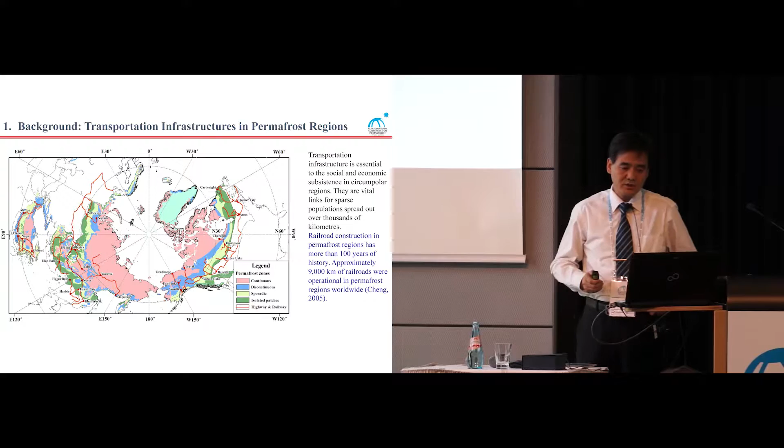Transportation infrastructure is essential to social and economic subsistence in polar regions, and is very critical for sparse populations spread out over thousands of kilometers. In fact, railroad construction in permafrost regions has more than 100 years of history. Approximately 9,000 kilometers of railroad were operational in permafrost regions before the Qinghai-Tibet Railway was constructed.

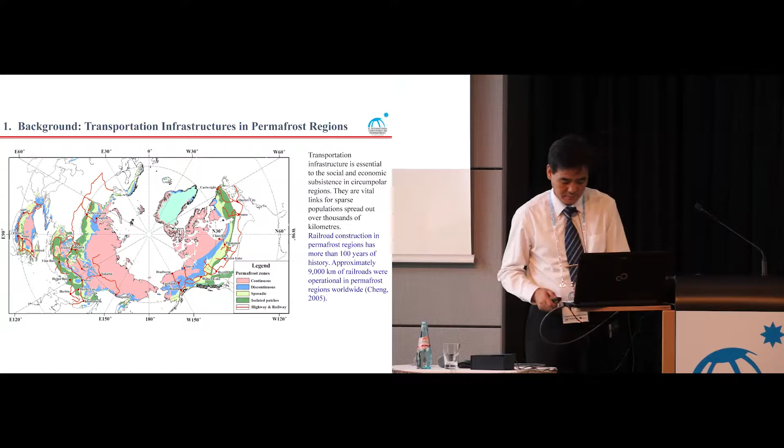In China, permafrost is distributed over about 1/4 of the land territory, with the main part on the Qinghai-Tibet Plateau, which we call high-altitude permafrost. It's about 7% of the Tibet Plateau land area. Another area is in northeast China, similar to the permafrost in Russia.

We can see many roads and highways in permafrost regions, and here is the oldest railroad in northeast China.

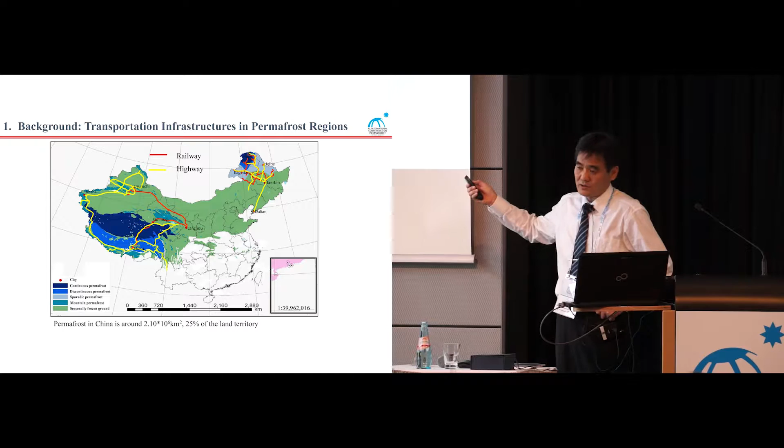That is similar to the population of Macau, China, so that is a very sparse population in the northern part. In Yukon and the Northwest Territories, the population is only 80,000 — that's equivalent to all the people who could gather in the National Stadium in Beijing. So the population is pretty sparse.

However, transportation infrastructure is critical, and sometimes life-supporting, for local people and social development. So how about permafrost influencing infrastructure? At first, we know normally permafrost is enriched in ground ice and sensitive to temperature change.

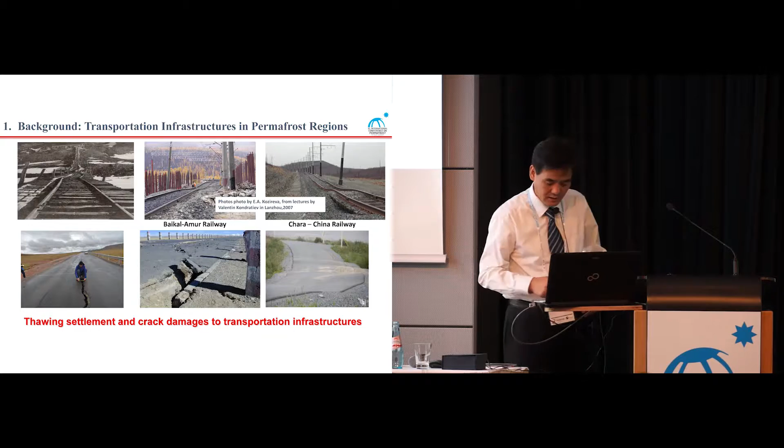We can also see settlement on the Alaska Highway. So thaw settlement causes damage to transportation infrastructures, affecting nearly all of them.

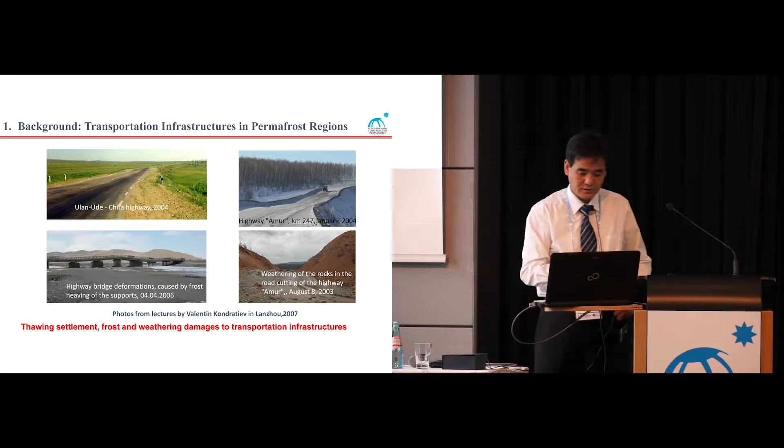Another problem is frost heave, like this one — the pole was frost-uplifted and the surface is tilted. So thaw settlement, frost heave, and even weathering of the rocks can damage transportation infrastructures. Anyway, thaw settlement is the most serious one.

So how about the situation of existing infrastructures? According to investigation, about 30% of the total length of the Trans-Siberian Railway was damaged. Of the Baikal Railway, the damaged region is over 30%. Of the Qinghai-Tibet Highway, the damaged region is also over 30%. So, in total, the damaged region was over 30% for existing roads before the Qinghai-Tibet Railway was constructed.

So permafrost degradation is still an enormous challenge. How about permafrost degradation? I'm not just concerned with how much and how large an area of permafrost has degraded — our IPA president, Professor Antoni Lewkowicz, said it is not permanent. What we know is that disturbing because permafrost thaw tends to be irreversible.

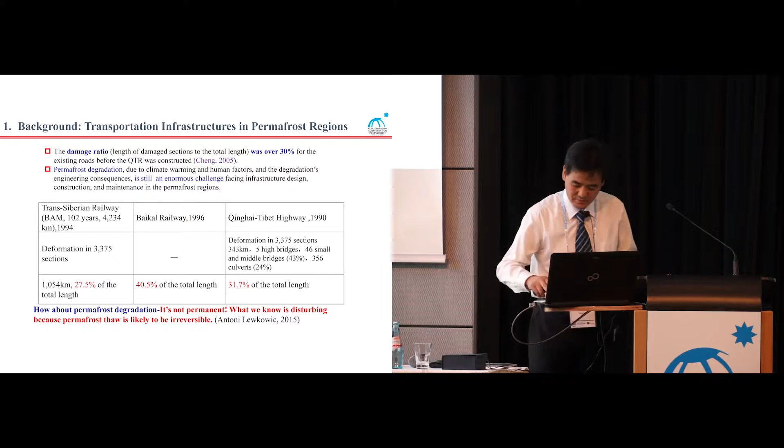That is permafrost change and infrastructure around the world. How about permafrost degradation on transportation infrastructures? First, let's look at global natural changes — Lawrence and Slater predicted degradation of permafrost area by 62% and 90% under different scenarios.

Recent results also show the same degradation trend. Chinese researchers projected changes in high-latitude and high-altitude permafrost regions during the period from 1986 to 2099, meaning degradation will continue.

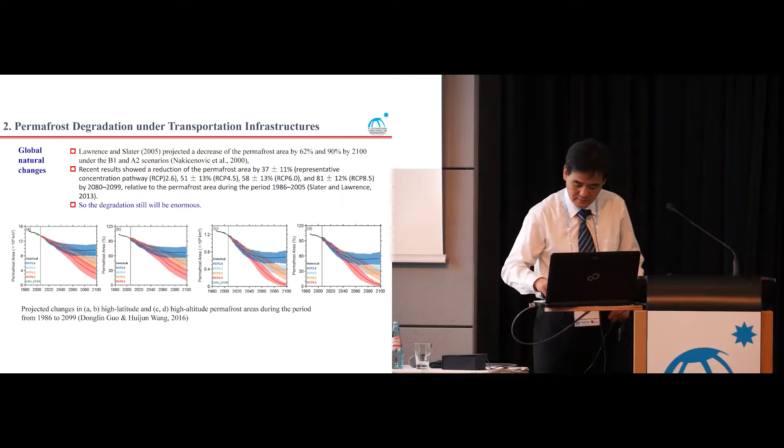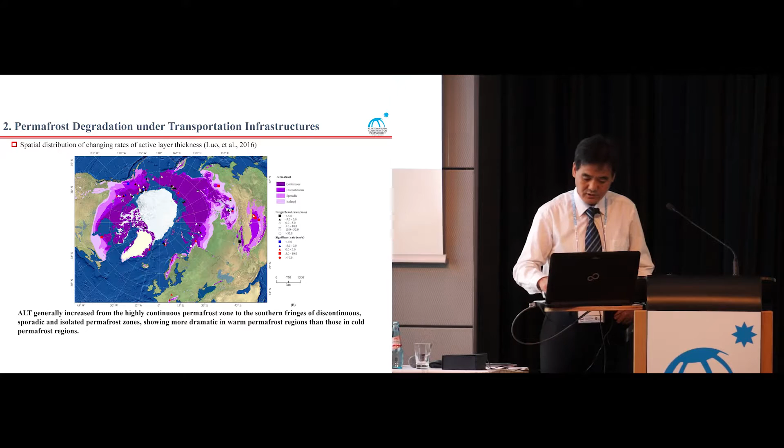So how about the degradation-caused risks or damages to local infrastructures? Professor Nielsen showed pictures about the risk around the Arctic regions and also Tibet regions. We can see the most serious region is around this area, and also on the Qinghai-Tibet Plateau.

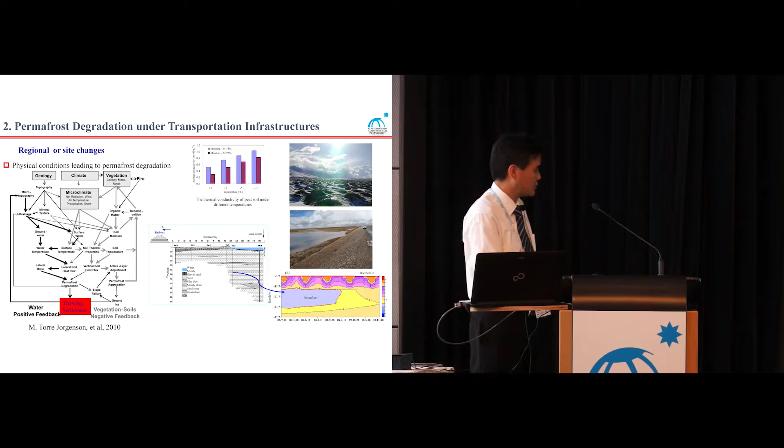So how to solve the problems? Again, we use this map that Professor Jorgenson showed. It's quite complex. Anyway, from the physical conditions leading to permafrost degradation, it's somewhat about geology and climate, especially microclimate change, and the vegetation on the surface may change. At last, the problem influencing the infrastructures is soil settlement, like removing the peat soil, because peat soil in thawed and frozen states has quite different thermal conductivity, and it's also related to water content and surface water gathering.

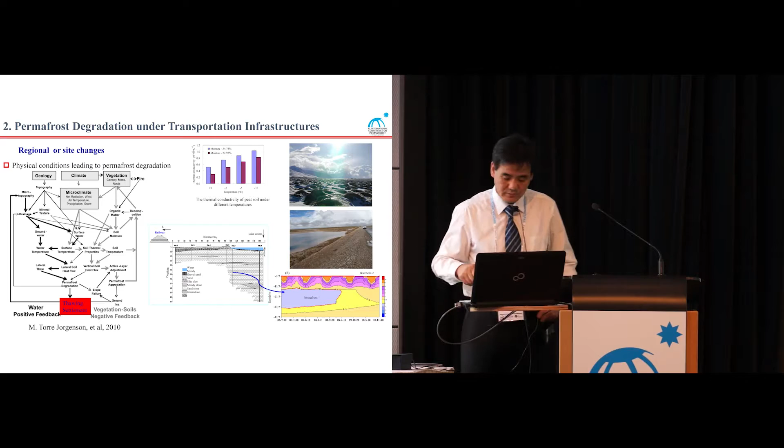Fortunately, we monitored a thermokarst lake near the Qinghai-Tibet Railway Highway. In 3 years, about 23 meters of the thermokarst frozen soil disappeared, from 2006 to 2009, as this picture shows. That means water gathering on the surface can influence local factors by degrading the permafrost.

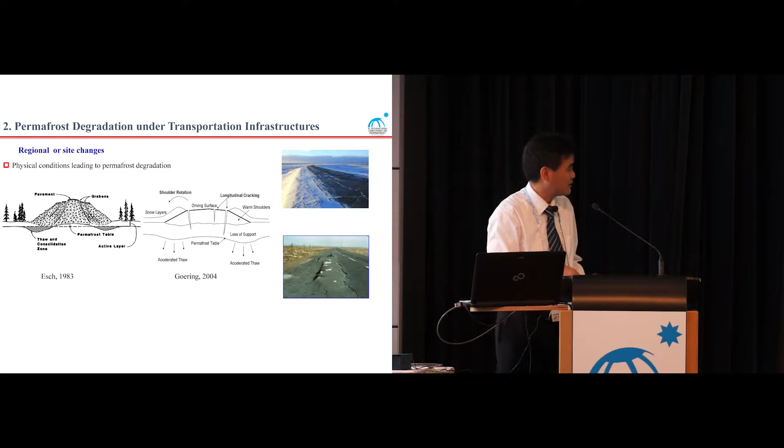Because of soil degradation, the physical conditions of the embankment will also change. Because of thawing at the toe of the slopes, the soil will be consolidated, and because of the slopes on two sides, heat will be absorbed from the slope surface and the embankment surface. Even because of snow cover, the warming will lead to degradation of the permafrost here. So sometimes cracks caused by settlement will occur, and even sometimes landslides or serious settlement.

Some site monitoring results really prove this. Like this site along the Qinghai-Tibet Highway, we can see from 1996 to 2007 the thickness of the active layer is increasing, and the deformation is continuing, shown here by the deformation data. The deformation is well related to the thawing rate, meaning that with continuous degradation of permafrost, the deformation of the embankment or road bed will continue.

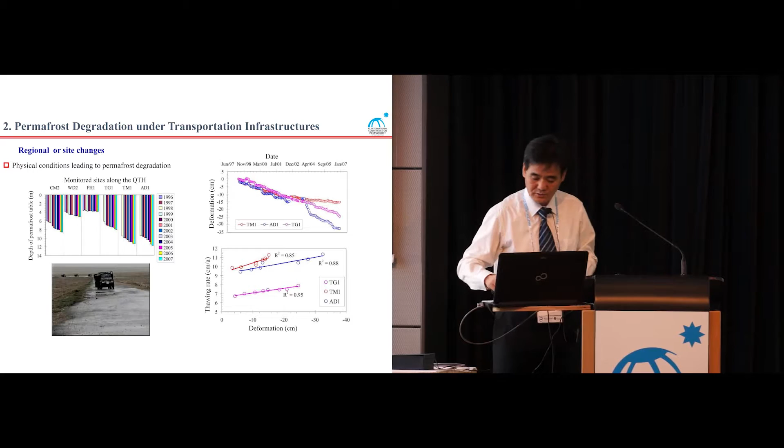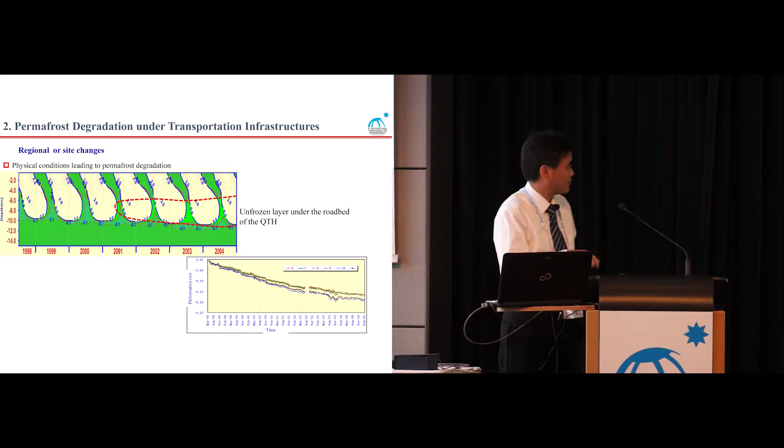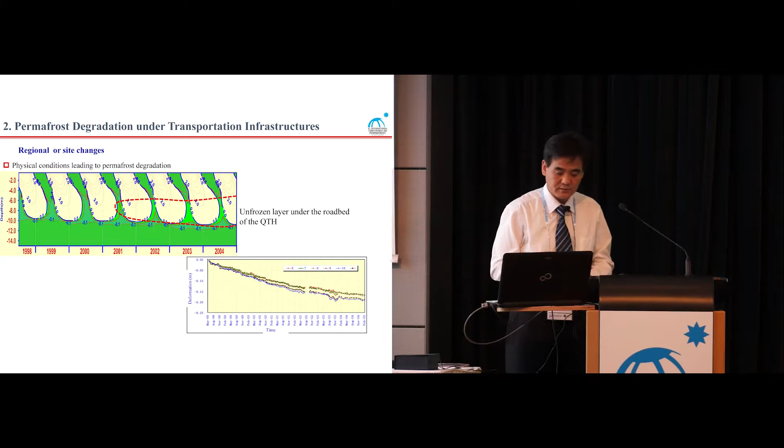Sometimes an unfrozen layer or unfrozen core will be formed under the embankment. This is also from the Qinghai-Tibet Highway: from 2001, a 4-meter-thick unfrozen layer formed, and the deformation of the embankment continued. So we can see the degradation or thawing of permafrost can cause engineering problems and damage to infrastructures.

So how to solve or prevent the problems? We can see some engineering development of adaptive capacity. At first, we have the traditional passive method. We have studied this kind of method for a couple of years. In the past, like this old lady selling ice lolly, she covers it with a quilt. But unfortunately, this kind of method cannot solve the melting problems forever, even for a long time.

So we tend to increase the thermal resistance by increasing the embankment height from the engineering side. But if the embankment height is increased, the slope area will increase, so heat absorbed from the sunshine will increase. So maybe the embankment should instead be lowered, and at last there should be a reasonable height in different regions. Anyway, the passive method, even using geotextile, can only delay the permafrost thawing, but cannot ensure thermal and dynamic stability of the permafrost for a long time.

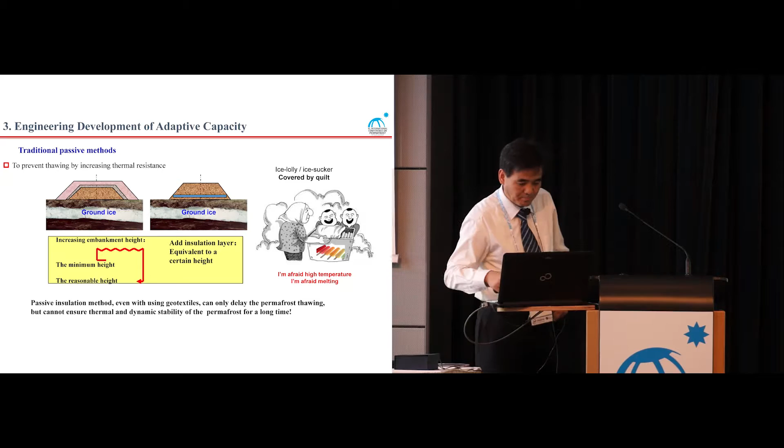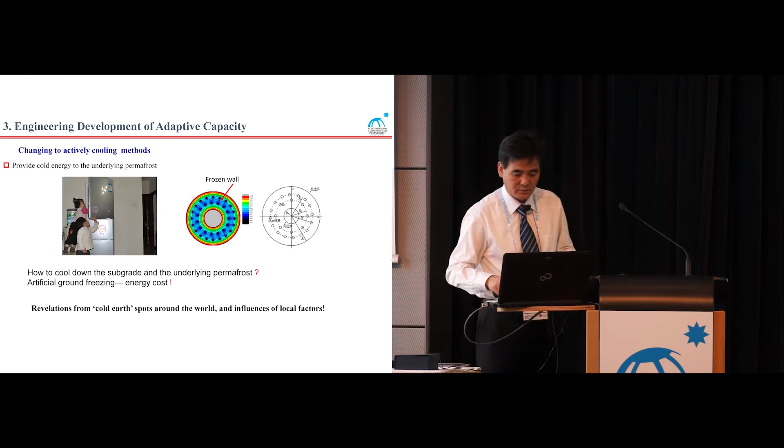So what can we do? Can we use an artificial ground freezing method? The answer is no, because it's too energy costly. So how to cool down the subgrade and underlying permafrost? As artificial ground freezing cannot be used, to find where to get the cool energy we turn to cold regions around the world to see what factors influence the existence of permafrost.

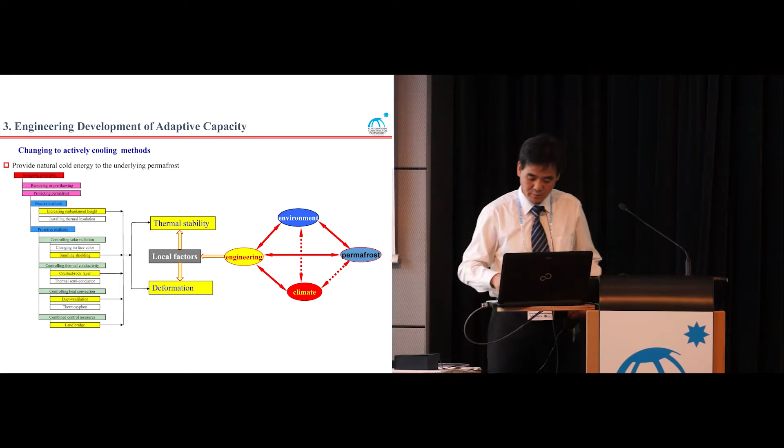In this way, we can control radiation, control thermal conductivity, and control heat convection. Because there's a complex interaction between environment, permafrost, climate and engineering, the only way is to use engineering methods to change local factors to influence thermal stability and deformation, and to control the deformation. So again, we use this system involving geology, climate, especially microclimate, and surface conditions.

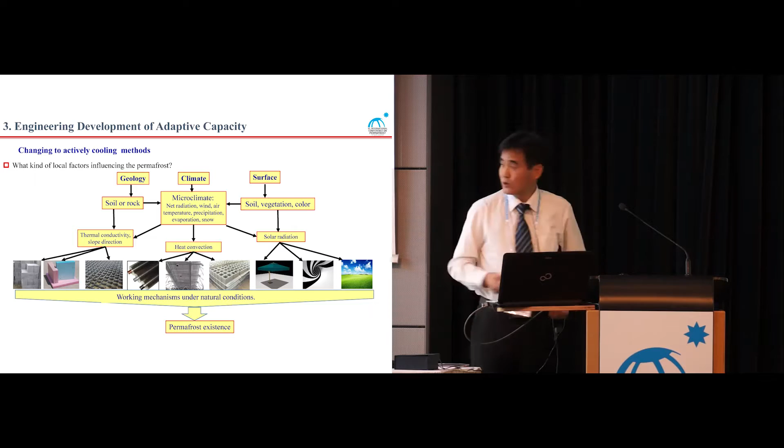At first, we can change the soil or the rock or some other kind of materials. We can also use heat convection methods like the thermosiphon, and ducts, and things like hollow bricks. And we can change the color of the surface. We can also use sunshine shading and grass cover.

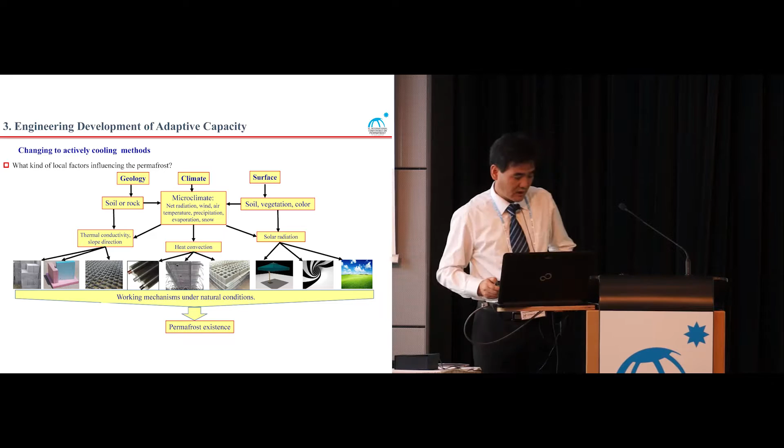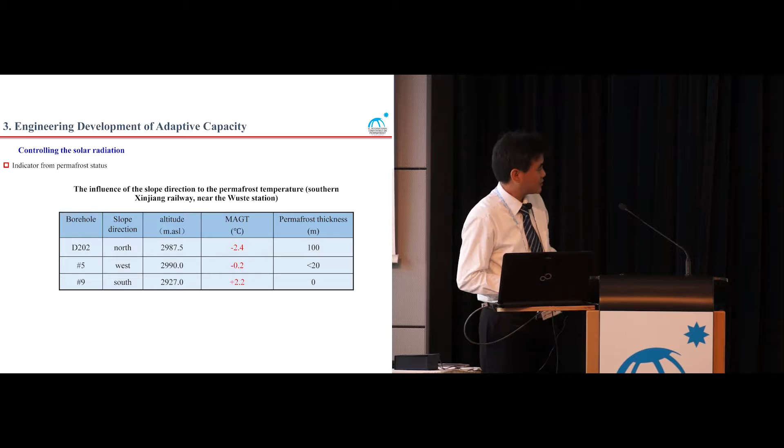So why do we control solar radiation? At first, we can see some indicators from permafrost status. This table shows the ground temperature at the north slope near the Wuste station in Xinjiang province, West China. The ground temperature is minus 2.4, and the permafrost thickness is around 100 meters. But on the west and south slopes, the ground temperature is quite high.

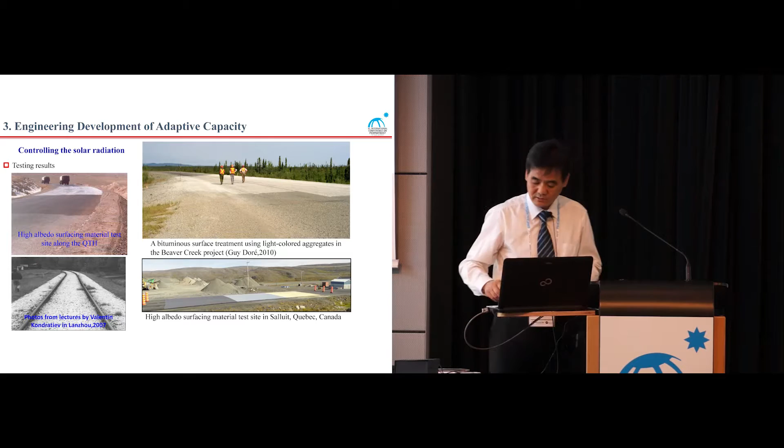So controlling solar radiation can greatly influence permafrost status. In engineering, high albedo surface materials were tested along the Qinghai Tibet Highway, but now it is disappearing. Also, bituminous surface treatments using light color aggregates were tried in the Beaver Creek project, supported by Guy Doré. High albedo materials were also tested in Salluit, Quebec, and sometimes the ballast can be painted white to reduce radiation absorption.

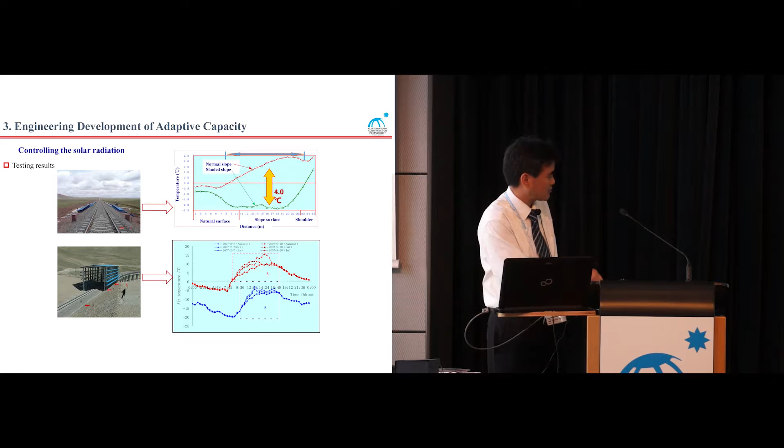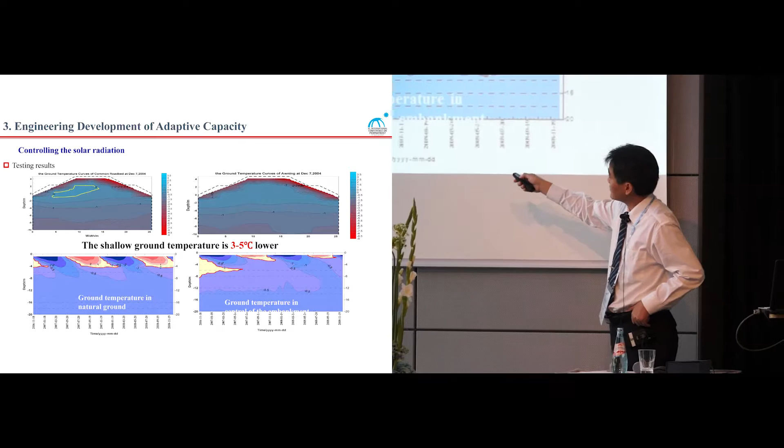There are many sites covered by blocks, scree, colluvium, or talus slopes where we find ground temperatures different from the nearby area. At least 20 reported cases around the world show the ground temperature is greatly lower than the surrounding areas.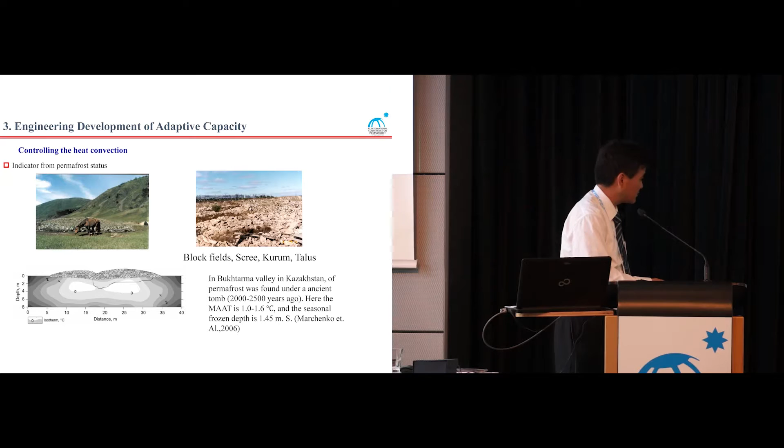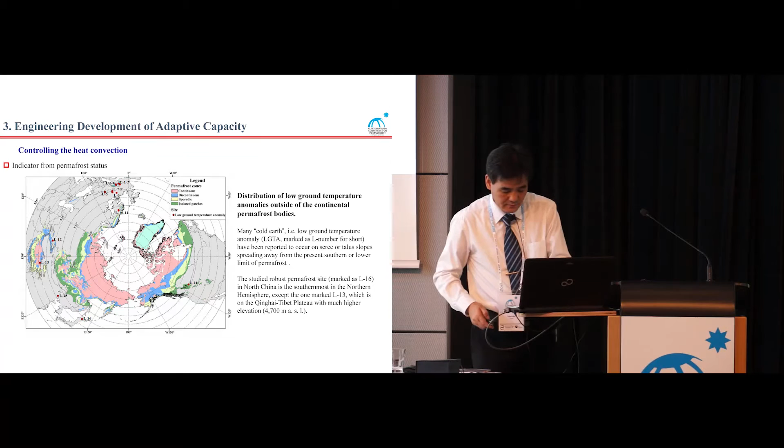I monitored this site in China. It is 200 kilometers from Beijing and 600 kilometers from the south edge of the permafrost. The air temperature here is about 7.3 degrees Celsius, but we can see here that in some regions there are no trees.

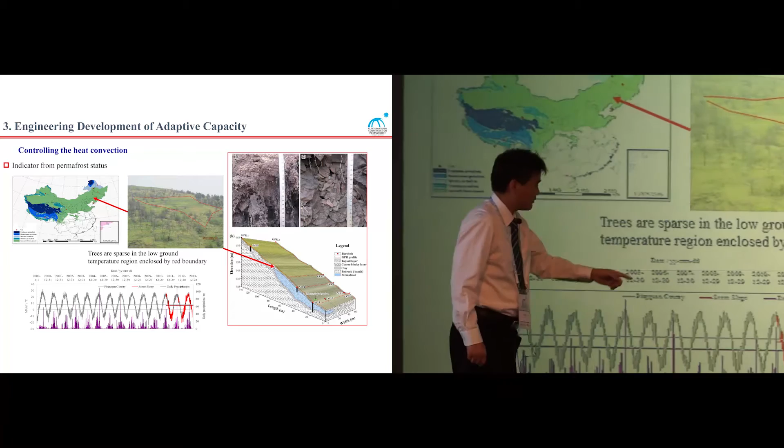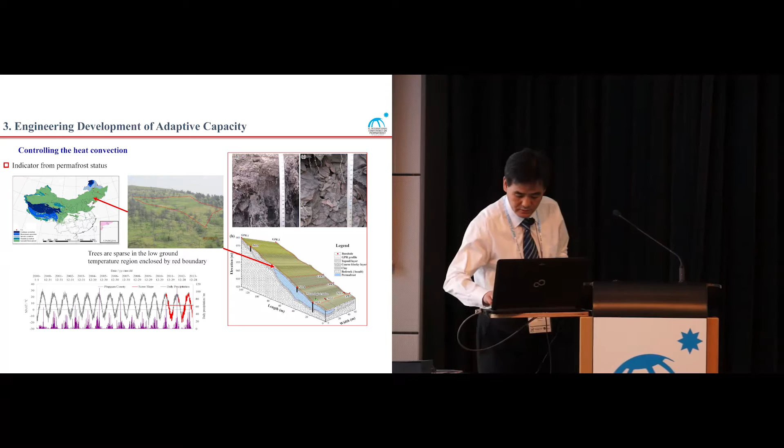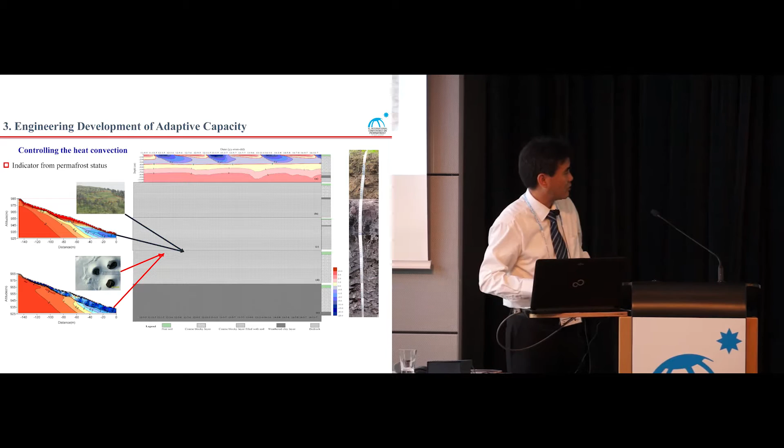In some regions there are no trees. Investigating with GPR and monitoring work, we can see there's permafrost around these areas, under the crushed rocks, with ground temperatures like this. In winter, from these two boreholes, we see minimal ground temperature around -5, and average around -1. In summertime there are no trees, and in wintertime there are holes on the floor, meaning air is convecting inside.

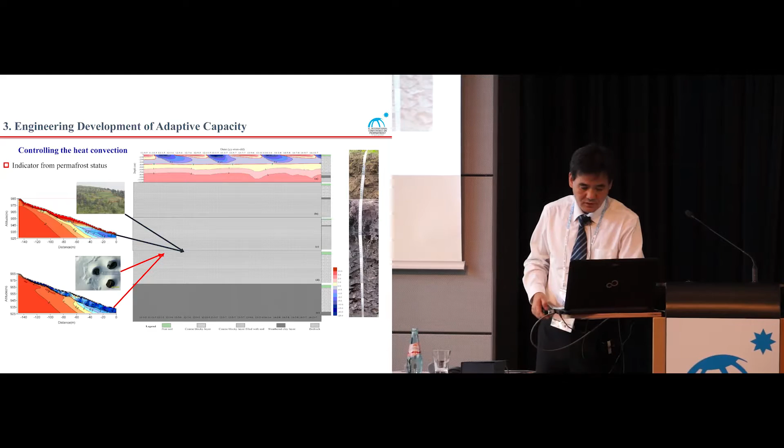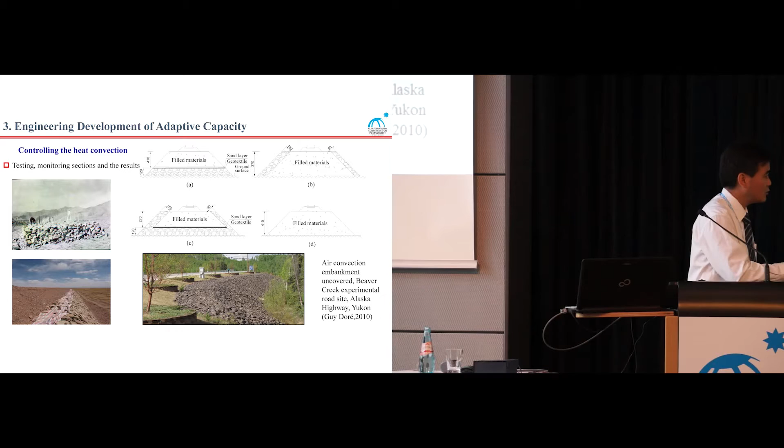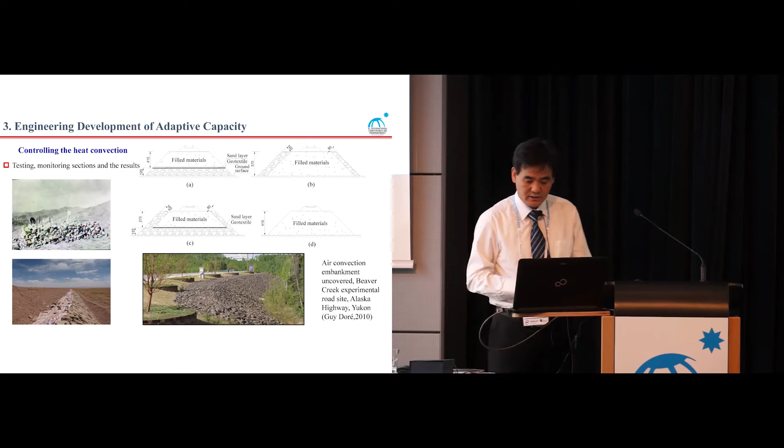From this, we can apply it to infrastructure construction. This was tested by Professor Cheng Guodong around the 1970s, with quite good results. We used three kinds of structures: crushed rock basement embankment, crushed rock sloped embankment, and U-shaped crushed rock embankment, also called air convection embankment, ACE embankment, at the Beaver Creek experiment site. So how about the monitoring result?

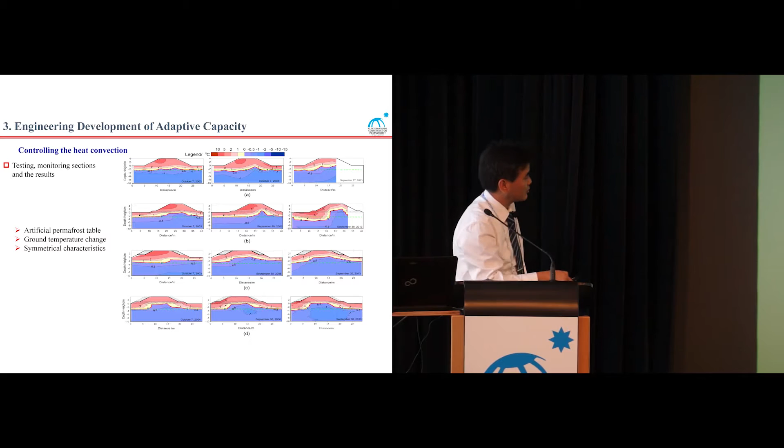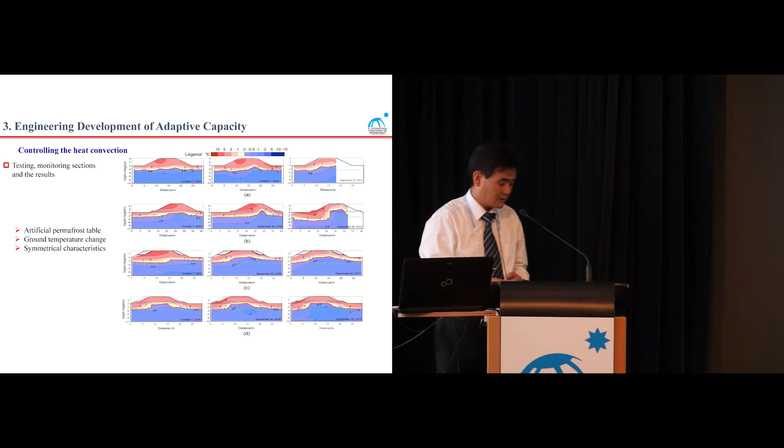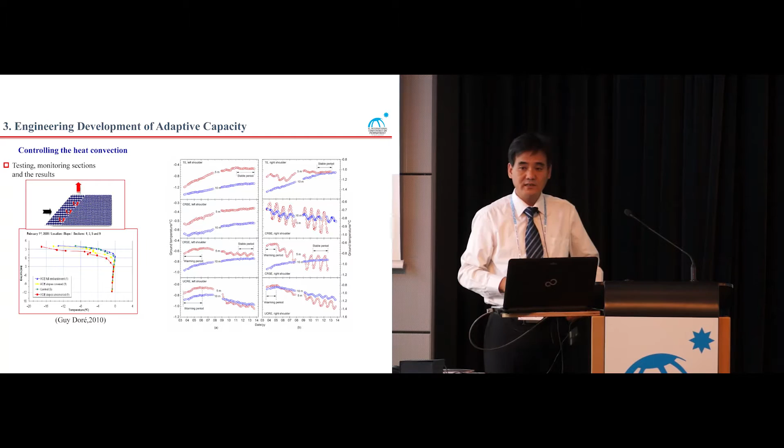At first, the upper one is the traditional embankment. We can see after construction, the ground temperature increased. On the crushed rock basement, sloped, and U-shaped embankments, the ground temperature was lowered. Unfortunately, the symmetrical character of this one is not good because it can cause cracks. The same result was obtained at the Beaver Creek site, and ground temperature monitored over 10 years shows that after the first 3 or 4 years, ground temperature at different depths decreased.

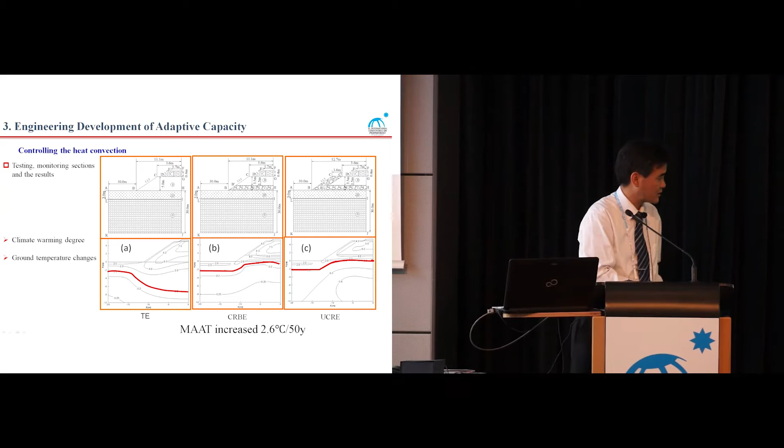How about structures to resist climate warming? From numerical simulation, we can see that if air temperature increases by 2.6 degrees over 50 years, such structures can still protect the underlying permafrost. But the traditional embankment cannot protect the underlying permafrost.

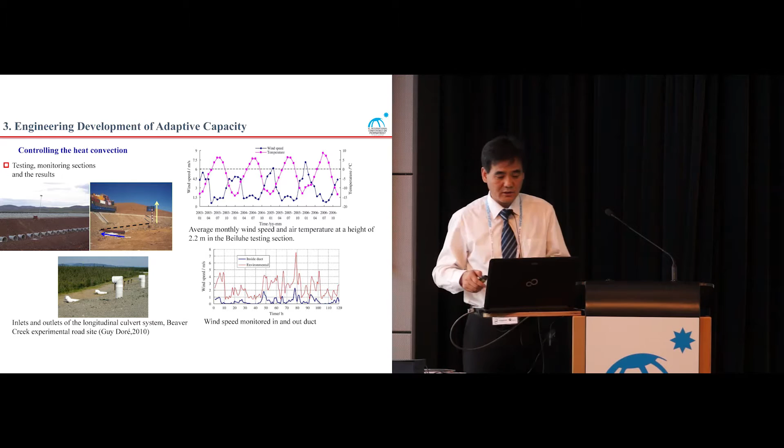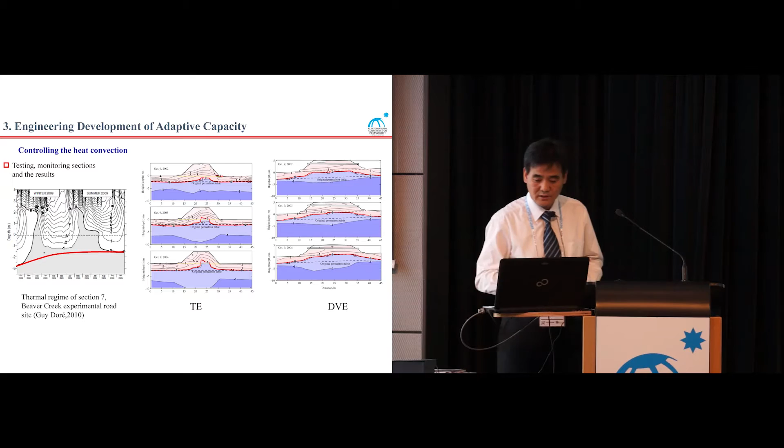The result from Beaver Creek shows the thawing depth was lowered. Also, just after one year, the permafrost temperature on the traditional embankment is quite high, while on the duct ventilation embankment it is quite lower. This is also what Professor Guy Doré called the heat drain structures at Beaver Creek.

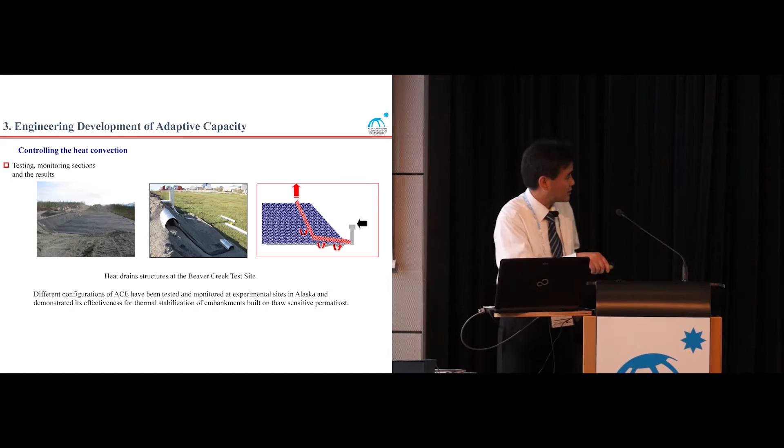Similarly, the mechanism is the same to let air convection flow into the embankment to cool down the soils. The third method is to control thermal conductivity.

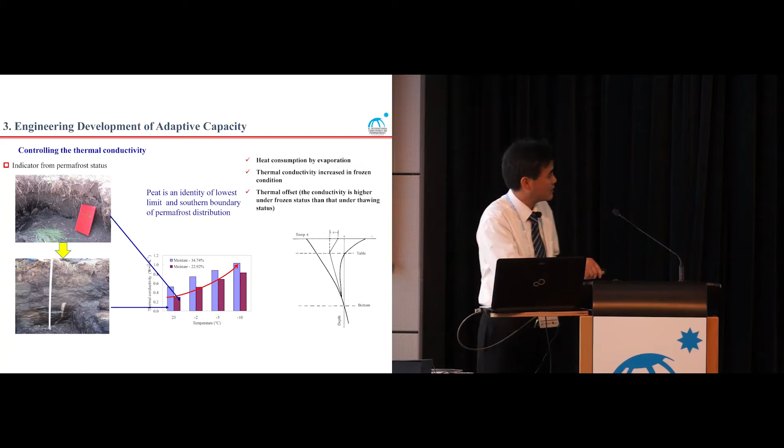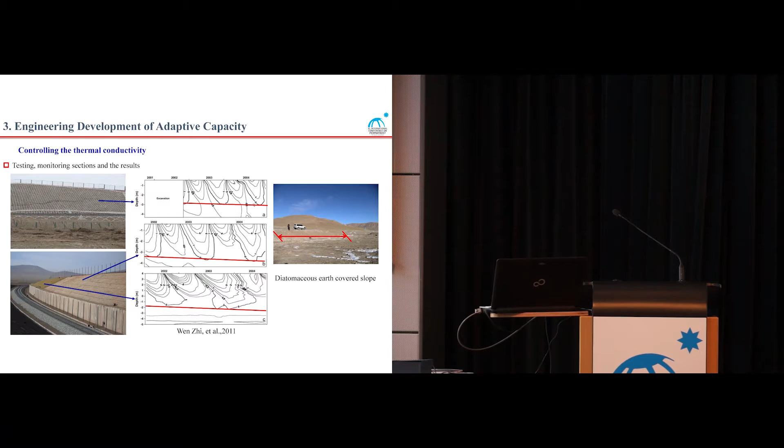The peat soils' conductivity differs under different temperatures and water content. We can also use offsets at the surface. This is shown along the Qinghai Tibet highway and railway. Here it's covered by grass, and the ground temperature is quite lower, while these form materials are somewhat warmer. Without anything covering it, the ground temperature is quite high.

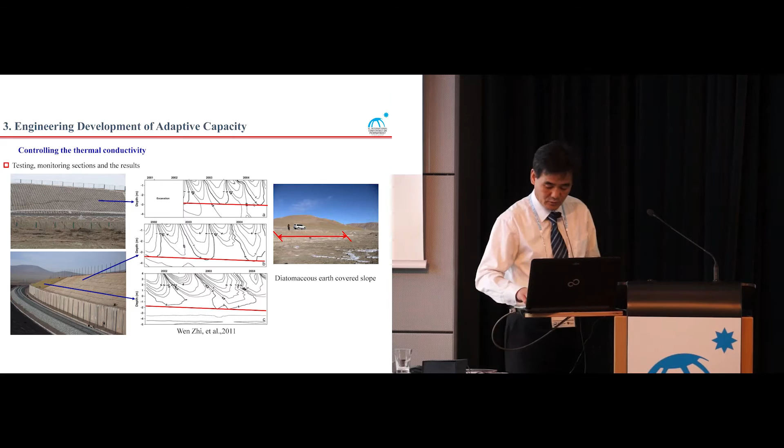So this is a kind of passive method that can resist warming, but eventually it will fail. A thermal insulation layer was also used, and we can see it just cuts down the range of temperature changes rising.

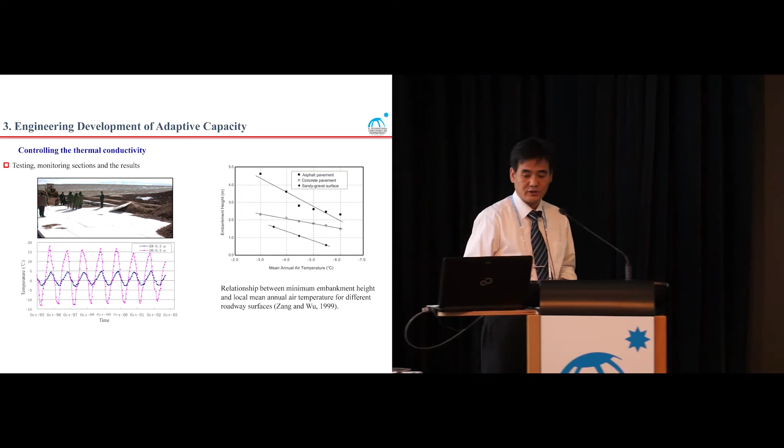Another way is to use thermosiphon. Anyway, this one is very expensive, but it is effective.

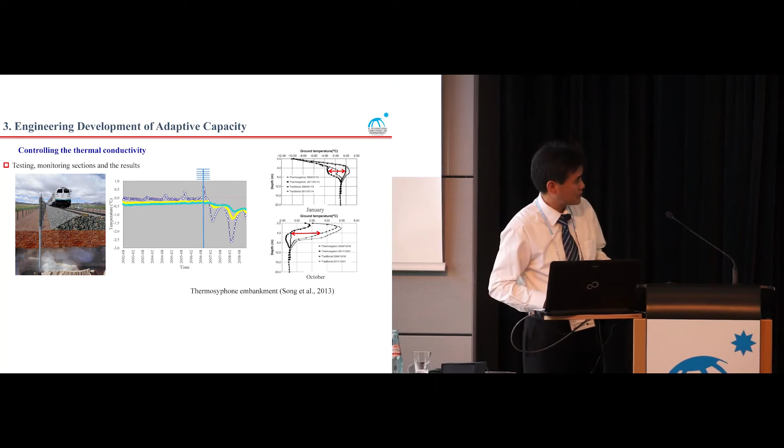We installed a lot of thermosiphons along the Qinghai Tibet highway railway because the ground temperature on the Tibet plateau is quite higher than in Arctic regions. When the thermosiphon was installed, the ground temperature greatly decreased, as shown from borehole monitoring at different depths.

If the condition is very complex or difficult to solve, then a dry bridge can be applied. The longest dry bridge of the Qinghai Tibet Railway is 11.7 kilometers long, in warm and ice-rich permafrost.

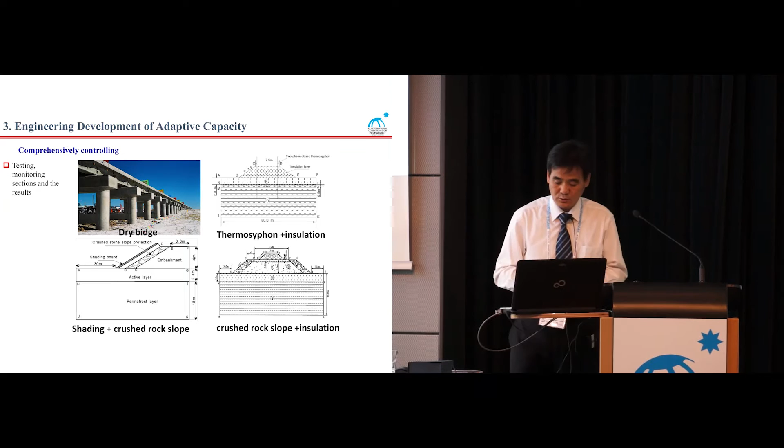The second approach is a combined method: covering the surface with crushed rock and thermal insulation, also combined with installed thermosiphons.

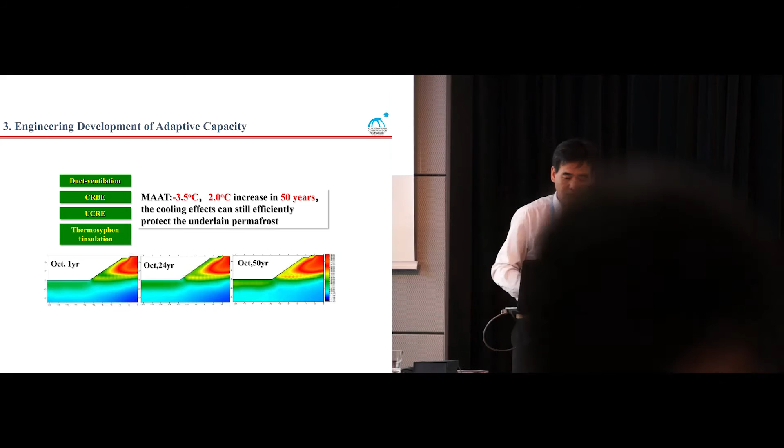All of the duct ventilation, crushed rock basement embankment, and crushed rock embankment with thermosiphon along with insulation can be used under such conditions. The mean annual air temperature is minus 3.5 degrees, with even a 2 degree C increase over 50 years. This method can still be effective.

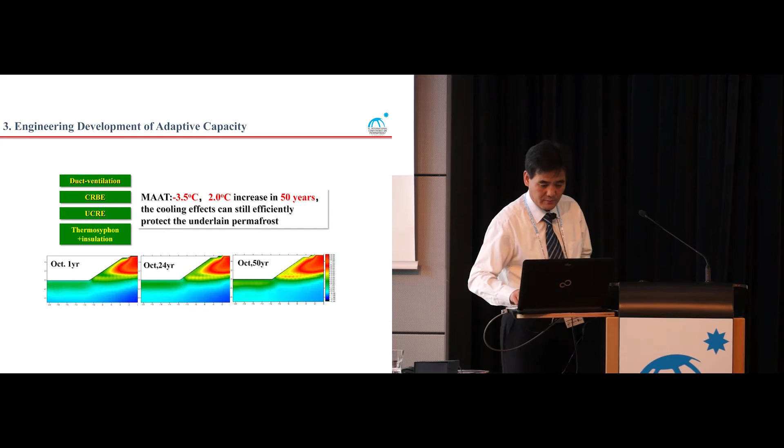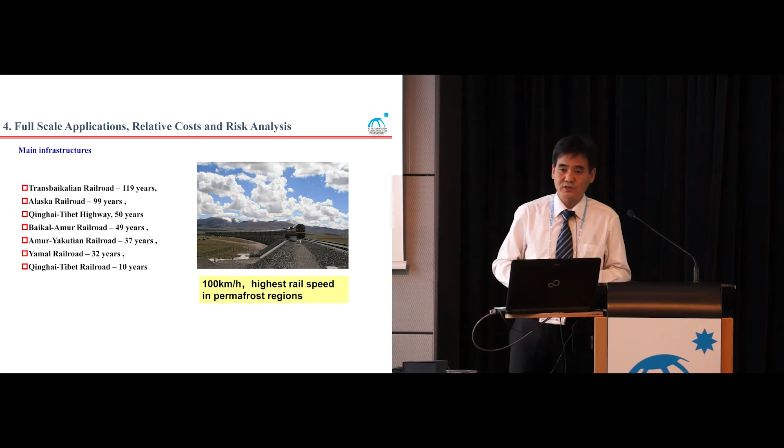So how about full-scale application? The main infrastructures in permafrost regions, like the Trans-Baikal Railroad, are nearly 120 years old, and the Alaska Railway is nearly 100 years old, with the newest being the Qinghai-Tibet Railway. Of all these roads, the highest rail speed in the permafrost region is the Qinghai-Tibet Railway, which has reached 100 kilometers per hour, meeting the design objectives.

Along the Qinghai-Tibet Railway, 142 kilometers of air convection embankment runs throughout the embankment, and also 156 kilometers placed along the side slopes, with 30 kilometers installed with thermosiphon. That means the total permafrost region distance is 550 kilometers long.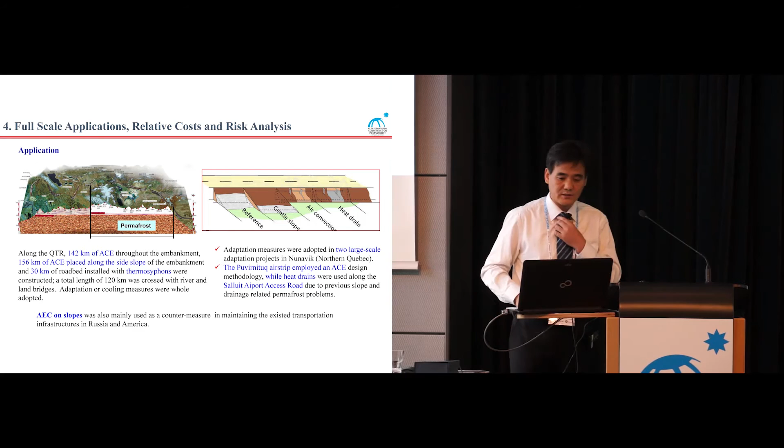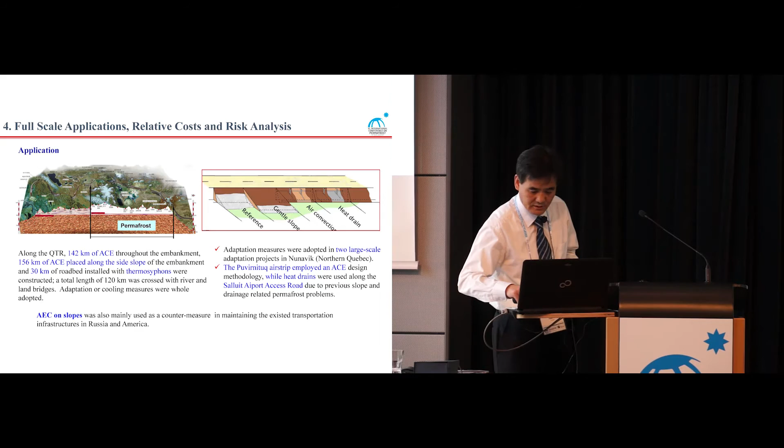Most embankment was constructed with active cooling methods, and it was also tested in two large-scale adaptations, in Nunavik and in Salluit airport testing sections. Some test risk investigation and evaluation along the Qinghai-Tibet highway was done.

About one or two years later, 1 degree C in 100 years was considered, and then about $0.5 trillion was added.

Another factor is environment change and weathering - wind blowing sand and snow covering can influence the cooling effect. As rocks weather, the porosity decreases, and the convection efficiency decreases. So we moved to primarily covering the crushed rock surface with geotextile and soils to prevent the blowing sand.

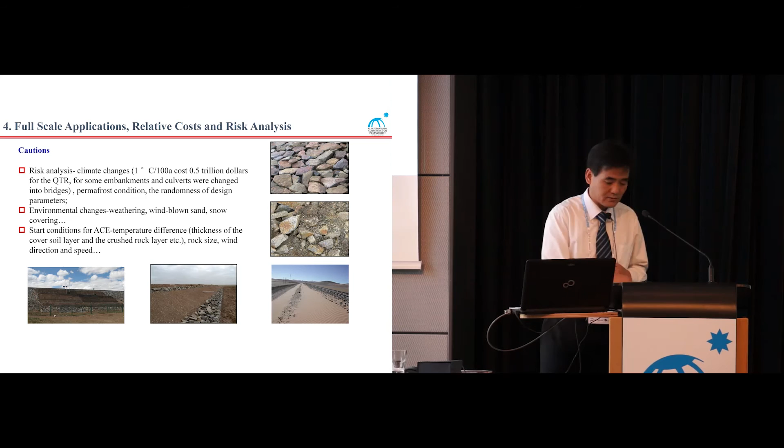In the future, maybe a superhighway will be constructed, and we designed different structures like this one. Here's crushed rock, and in the middle side is also crushed rock, and we can install some tubes to let the air flow into the embankment.

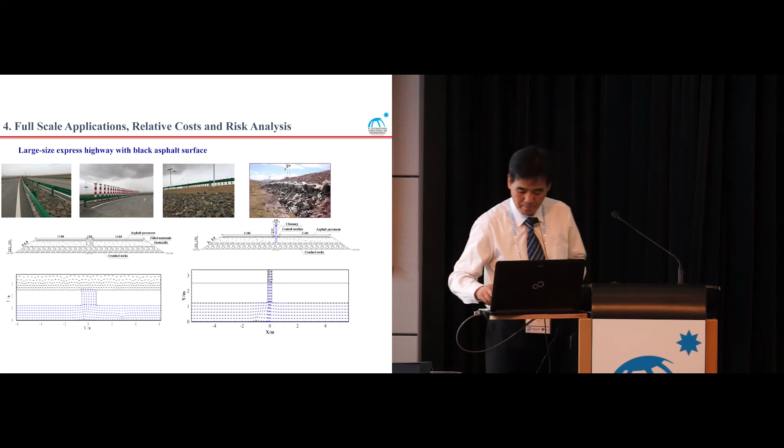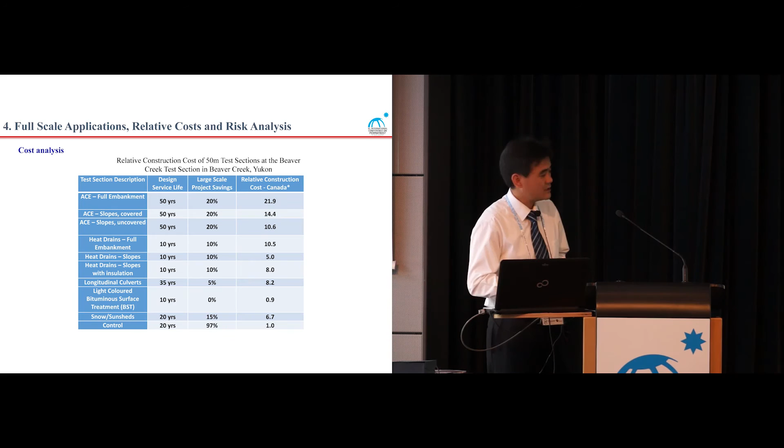Cost analysis is quite difficult - it's hard to see which method is most expensive. Anyway, ACE, that is air convection embankment, can save a lot of money.

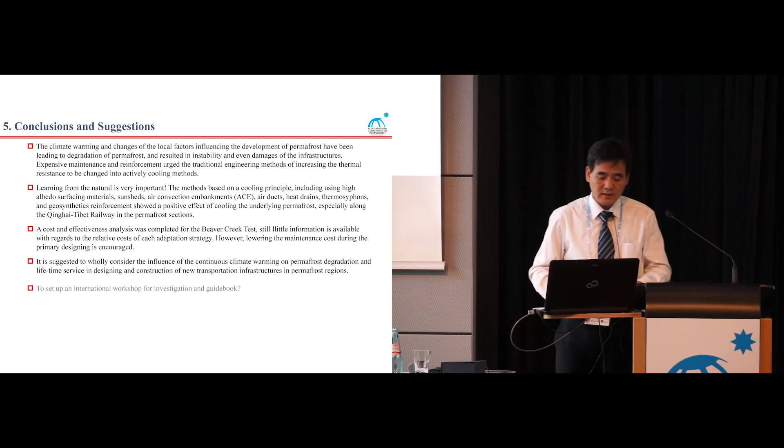So at last, I'll give some conclusions and suggestions. First, climate warming and the change of local factors influencing the development of permafrost have been leading to degradation of permafrost and resulted in instability and even damage of infrastructures. Expensive maintenance and reinforcement urge the traditional engineering methods of increasing thermal resistance to change into actively cooling methods.

Learning from the nature is very important. The methods based on the cooling principle include using high albedo surface materials, sun shades, air convection embankment, air ducts, heat drains, thermosiphon, and geosynthetic reinforcement, showing a positive effect of cooling the underlying permafrost, especially along the Qinghai-Tibet Railway in permafrost regions. A cost and effectiveness analysis was completed for the Beaver Creek test.

Still, little information is available with regards to the relative cost of each adaptive strategy. Lowering the maintenance cost during the primary design is encouraged. It is suggested to wholly consider the influence of continuous climate warming on permafrost degradation and lifetime service in designing and constructing new transportation infrastructures in permafrost regions.

And lastly, maybe a suggestion for IPA to set up an international workshop for investigation and guidebook is necessary.